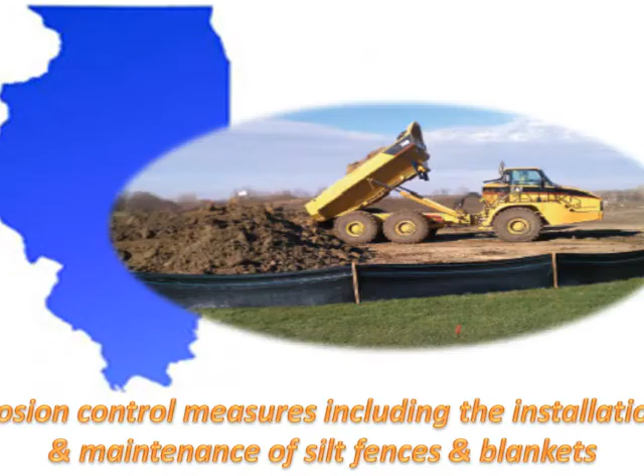It's not complicated. Site preparation activities began early October 2012. Existing trees were removed and some existing facilities were demolished to accommodate the new building. As per the design specifications, the owner carried out erosion control measures to minimize soil erosion, including the installation and maintenance of silt fences and silt blankets. S&K Excavation and Trucking Incorporated and TBS Construction Incorporated began carrying out excavation works on November 8, 2012, using track loaders, backhoes, and hydraulic excavators. No temporary shoring was deemed necessary for any of the excavation works, as only shallow excavations were required.

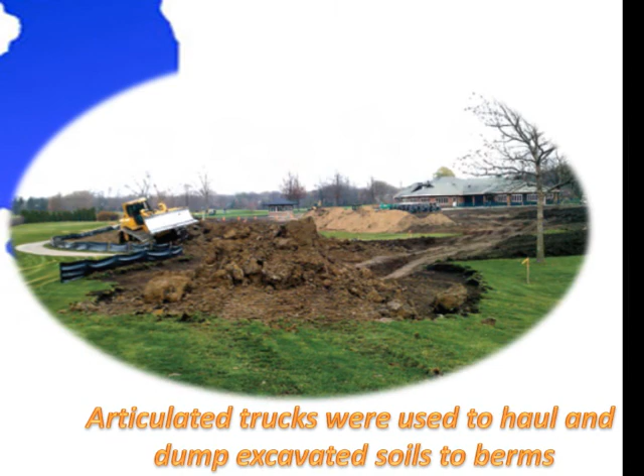The owner provided surface drainage and pumps to protect excavations from flooding. Articulated trucks were used to haul and dump excavated soil to berms. The berms are part of the design of the construction project. The design to place the excavated soils in berms saved significant labor and hauling costs.

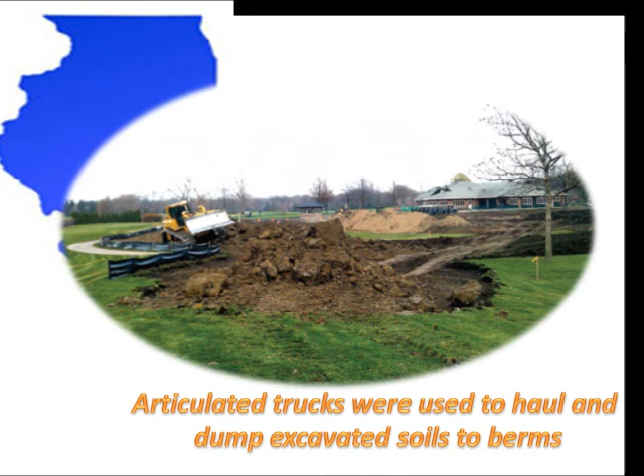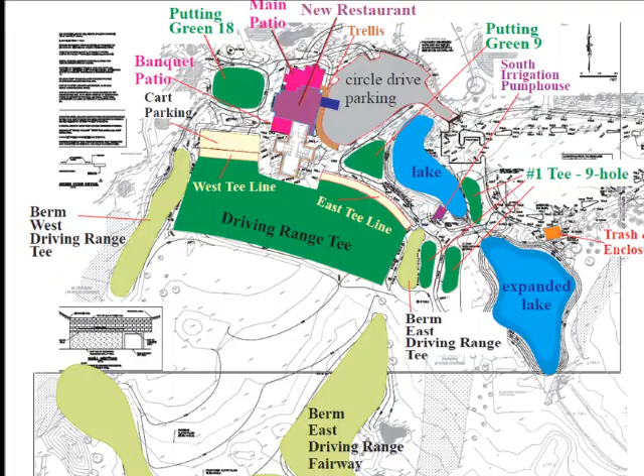The compacted subgrade had to sustain a maximum assumed loading of 3,000 pounds per square foot. Soil discovered at the building pad, northwest parking lot, and location of the new building footings did not meet this strength requirement. Through an extra work proposal, the soils were replaced with gravel or good quality soils already stored on site. Although an extra cost was charged to the owner, it's estimated an approximate $50,000 in savings in the contract, as they used soils that were excavated earlier to replace the poor soils. The reduction in hauling and the lack of new material all contributed to the savings.

So what's better, stronger or weaker? Stronger! Can you name me something that's pretty weak? You're pretty weak. Just saying, my dad can probably beat you up.

So, can anyone name me something strong? Dragons. What dragons? Well, I once saw my grandma come out of her room without any makeup, and I thought she was a dragon. I thought she was going to eat me up, and I was like, oh no, a dragon! Quite the imagination. Do you have a dragon too?

No, but I know something that's really, really strong. And what would that be? Concrete. Where does all this concrete come from? So like one time I was at this construction site for this golf course, and these huge trucks came with a whole bunch of concrete, and it just kept pouring out, billions and billions of concrete, and it was really strong all of a sudden, like really hard. And then they came and put gravel all over the concrete, and I fell on it and was rolling around like, oh, it hurts, it hurts, it hurts.

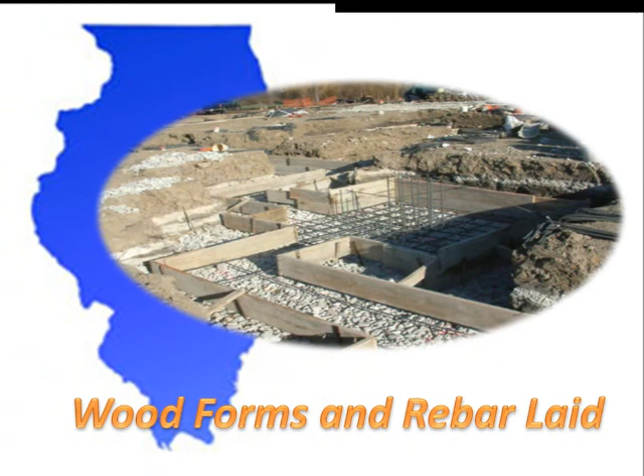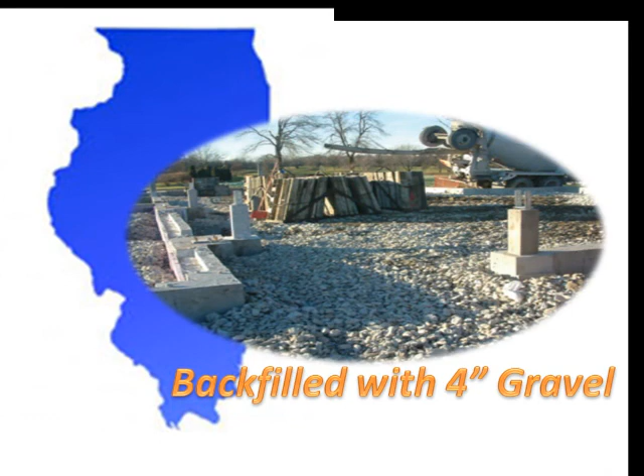Wood forms and rebar were laid in the excavation prior to the pouring of concrete from a ready-mix truck. The design specifications govern the amount of rebar used as well as the concrete mix. Metal forms are set up to allow for the concrete pouring for the foundation walls. After all works were completed, the excavation was backfilled with a 4-inch compacted layer of gravel.

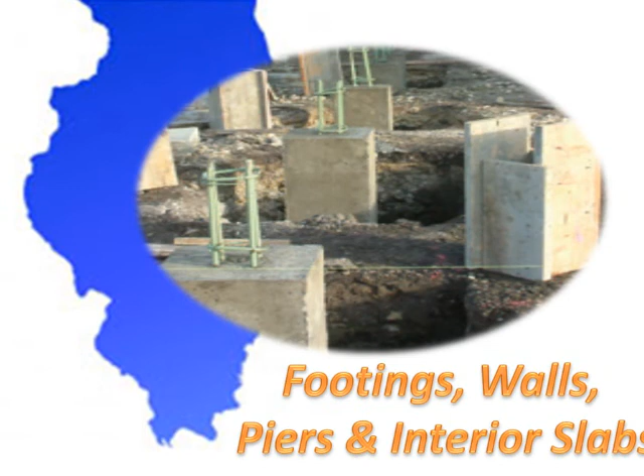Concrete was primarily used on the Village Links projects for footings, walls, piers, and interior slabs. Concrete being used for different purposes have different required minimum compressive strengths at 28 days. Also, all exterior concrete includes air entrainment to prevent frost damage.

Weather-related issues were frequently encountered when working with concrete. Since construction continued through the winter, concrete pouring was scheduled outside of freezing weather. This is because concrete needs to be cured for 4 days above freezing temperature.

So what's better, faster or slower? Faster! Can you name me something that's fast? Stacking subcontractors. Yeah, because if you stack subcontractors, then you have a lot of people, millions and millions of people working at the same time, at the same place, and it's like a factory. It's like Charlie and the Chocolate Factory. Except they'll probably be using plumbers and electricians instead of Oompa Loompas. So why would you need to be faster? It's important to go faster because it's taking so long to get the roof trusses built, and then everything's getting pushed back, and all the subcontractors can't get their work done. And now I have to get a time machine to go back in time to fix everything.

It's not complicated. Faster is better.

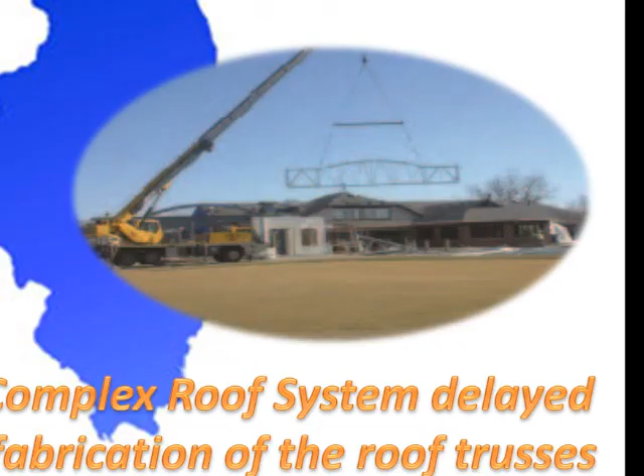The complex roof systems delayed engineering drawings, fabrication, and delivery of the roof trusses. The continued delay led the contractor to have to stack subcontractors just to keep on schedule.

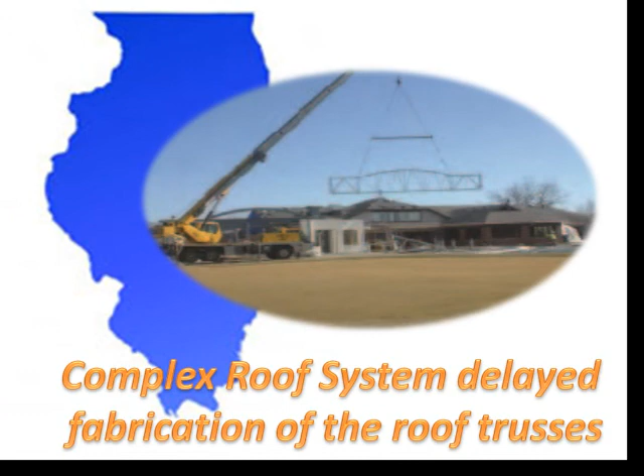Weather barrier strategies included the installation of ice and water shields, vapor barrier, and roof membranes, which prevented water leakage and flooring damage. The meeting room renovation included removal of the old carpet, drywalling, insulated heating ducts installation, and insulated windows installation.

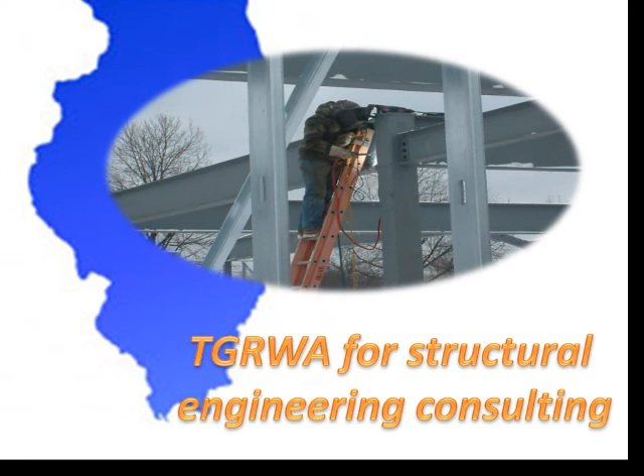PPK Architects subcontracted TGRWA for structural engineering consulting. The design of the structural steel frame system was dependent on the design of the roof truss system, which was completed in late December. All structural steel was fabricated in the Chicago area, resulting in a short haul distance.

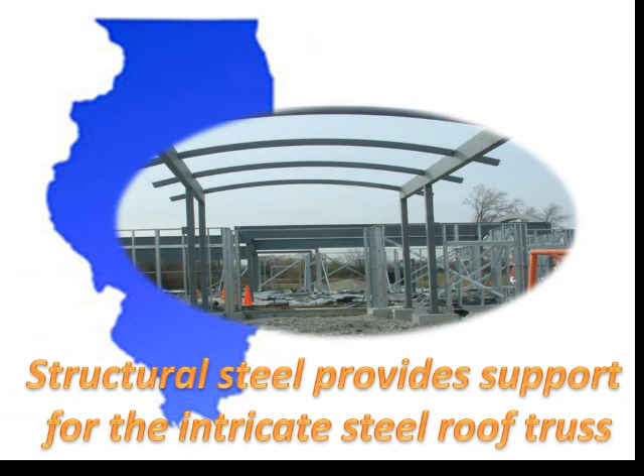While it only took 1 day to set all the beams in place, ironworkers stayed on the site for 2 additional days, including a Saturday, to finish the connections. Bolts and welds were used in connections. The welds were performed with E70XX low hydrogen electrodes, which conformed to AWS D1.1 specification. The structural steel provided support for the intricate steel roof truss.

The masonry used in the Village Links Improvement Project was for aesthetic and architectural purposes. PPK specified the various bricks and stones used to match the masonry on the existing building.

So what's better, more or less? More! Why is that? Well, sometimes when you're on a construction project, you want to save money, a lot of money. And so we have change orders and we have a lot of them. But then the contractor's like, no, you can't have change orders. Change orders delay things. But we're like, why? Why? We want change orders. We want more. We want more.

Tough challenges, kid.

It's not complicated. More isn't always better.

Because of the nature of the bid of the project, the plan of Village Links was to identify cost reduction opportunities through value engineering in hopes that the cost reductions would accommodate the increases that will result from change orders.

However, during the construction process, contractor E.P. Doyle & Sons expressed frustration over the large number of changes and pricing requests. Delays in construction and work in the field have resulted from having to spend excessive time on managing design and pricing changes. In addition, these changes have resulted in the need to stack subcontractors and increase productivity and responsiveness of some of the subcontractors.